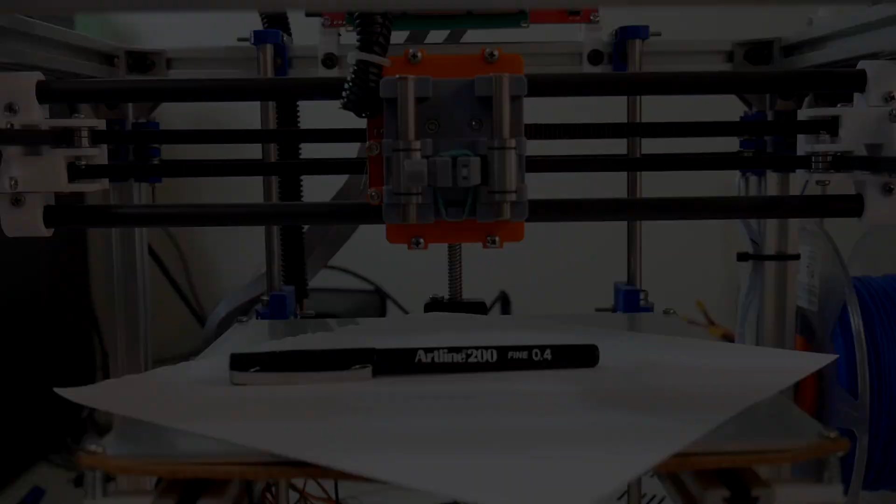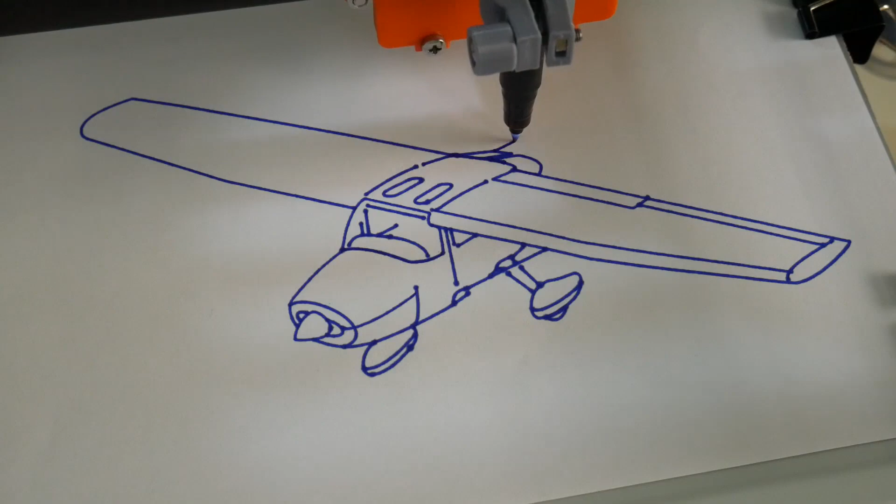In this video we're going to revisit Fusion 360 and how to control our 3D printers with it. But unlike last time where I used a pen to simply draw an outline or trace of an object, and I'll link to that video in the description below, this time I'm going to attach the pen to the X carriage here. We're going to actually draw in or color in a solid shape using the pen rather than just an outline, and to do that we're going to use the 2D pocket feature within Fusion 360.

The pen we're going to use in this video is an Artline 200. It's a felt tip pen with a line width of 0.4 millimeters.

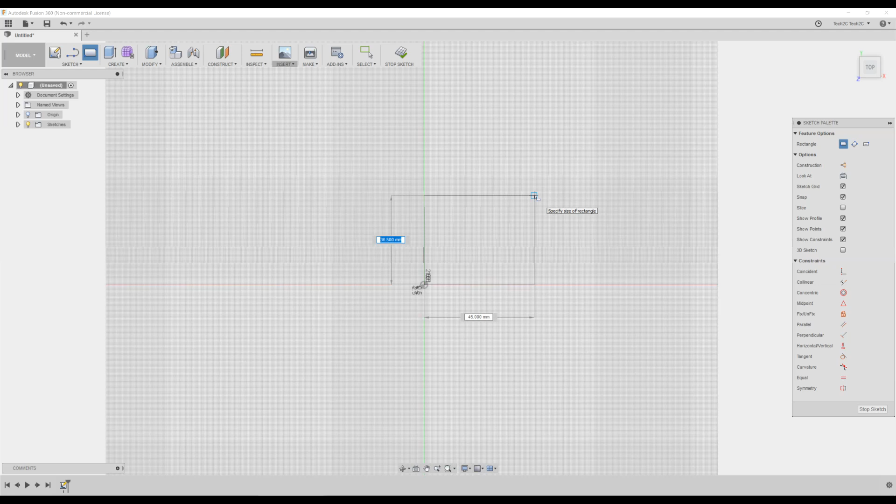To begin, in Fusion 360, I'm going to draw a square on the X and Y plane, starting from the center, with dimensions 200mm by 200mm. This is the size of our build platform. But unlike the previous video where we were just tracing the outline of the shape, we need to make this solid so we can extrude within this shape for the 2D pocket feature. So we'll click on this square, click the extrude button, and give it some height - we don't need much, so I'll just make it 0.1 millimeters. So here is a very large, very flat square, which represents our build platform.

Now we're ready to import our image file. To do that, I'm just going to click on the top of our square here, then click Insert, Insert SVG, and open an SVG file I've downloaded from the internet. This is just a picture of a sports car. And there it is down there, and as you can see, it is upside down as well.

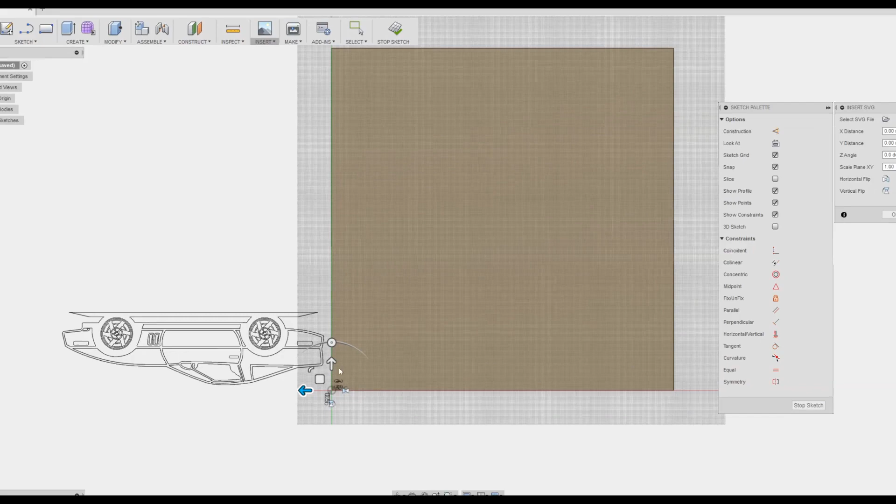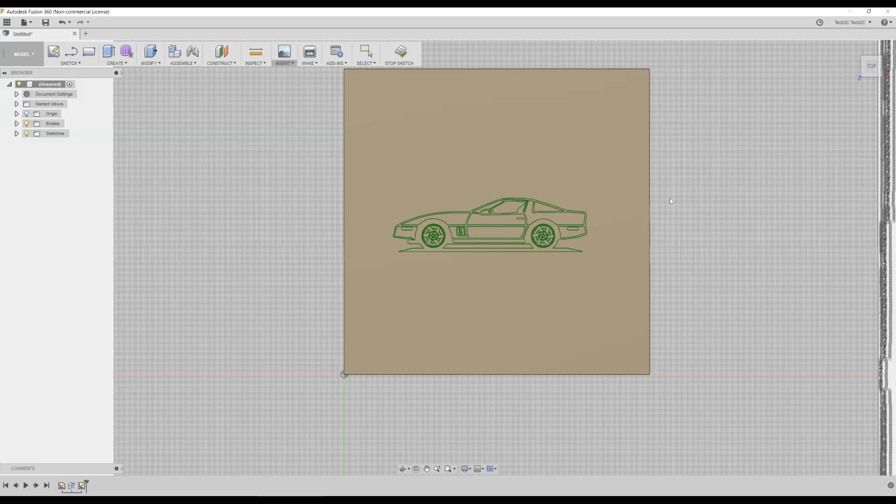So I'll move that into position and flip it on the Y-axis. I might make this just a little bit smaller - it doesn't need to be that large. Yeah, that'll do. And just recenter that once more. Press OK and stop sketch. So now we have a picture of a vehicle on top of this very shallow square.

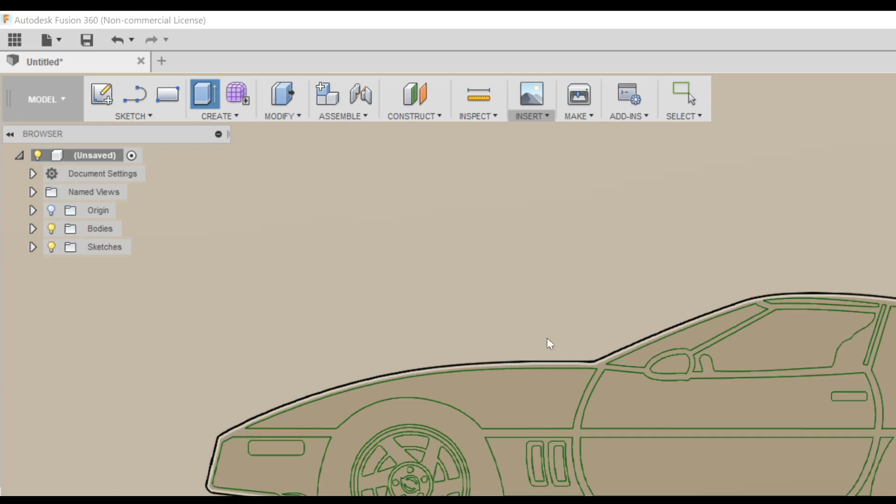The last thing we need to do is actually indent the shape of this vehicle into this square we've just made, to allow the 2D pocket feature to draw the shape of this car. To do that, we'll click the extrude button and choose a shape we want to extrude. This shape here is the main outline of the car, so I'll click that. But I also want the wheels to come through, so I'll click on the rear wheel and the front wheel. Yeah, that'll do. And we need to give it some depth - we're 0.1 millimeters high now, so we want to go inwards, so it's going to be a minus symbol, but we don't want to go all the way down to 0. We want to leave some material there, otherwise the CAM process won't work. So we'll go down by 0.01 of a millimeter.

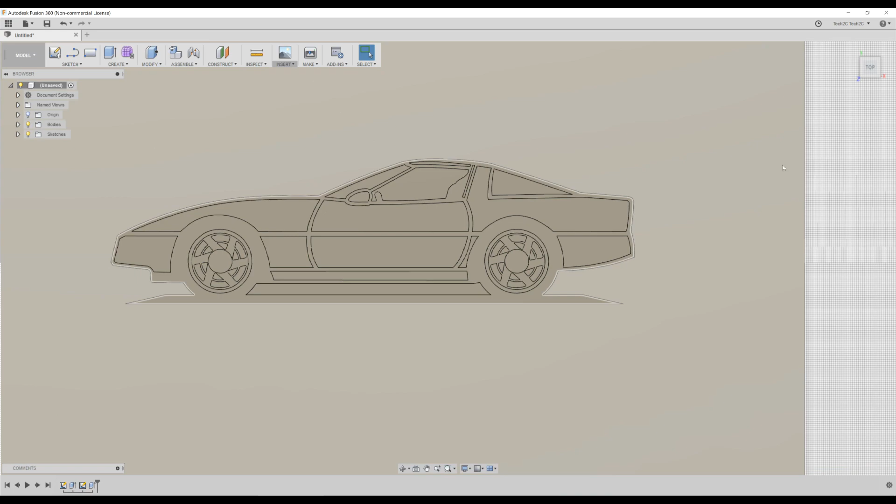So now we have on this very shallow square an indent of the shape of this vehicle.

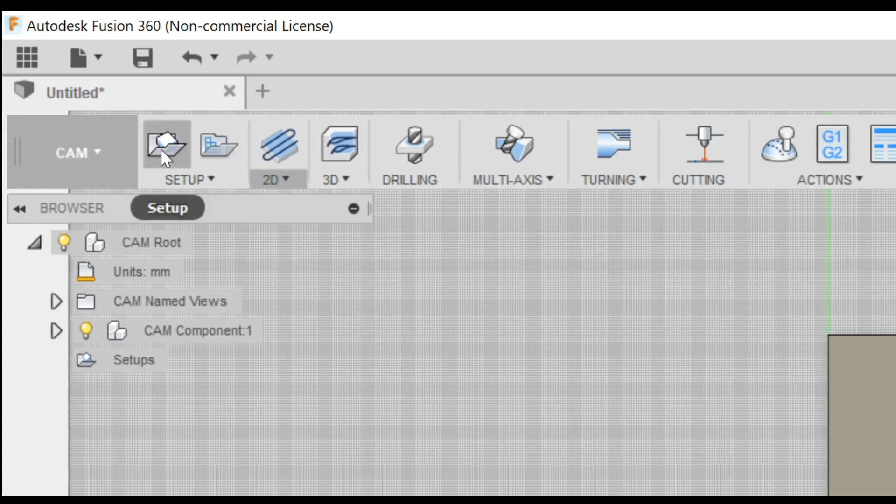Now we're ready to go to the CAM module. To switch to the CAM module, from the top left hand side on the drop down, select CAM. To begin, select Setup from the top left hand side. From the setup options, change the origin to model origin, and you'll see the XYZ arrows move to the bottom left hand side. So this is going to be position 0,0, which it is on our 3D printers.

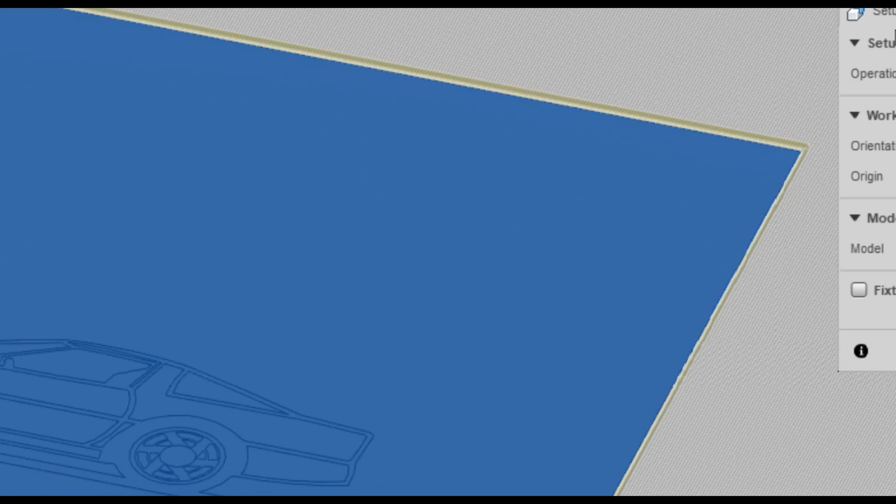Moving across to stock, change the stock offset mode to no additional stock. And as you can see, the 200mm square that we drew earlier is actually going to be our pseudo stock - in this case, it's just the piece of paper. We're not cutting the piece of paper in this example, but it serves the same purpose in this regard. And finally, press OK.

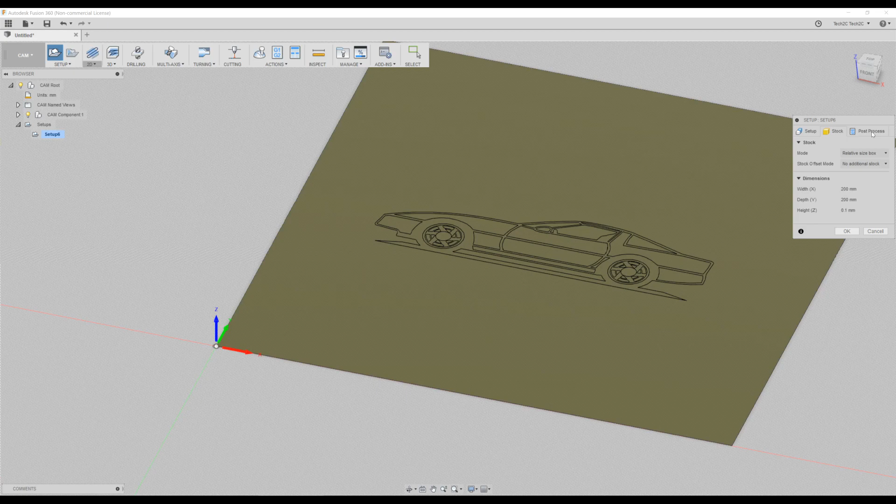Now we're ready to create our 2D pocket, which is going to draw this shape within this square. From the top left hand side, in the 2D drop down, select 2D pocket.

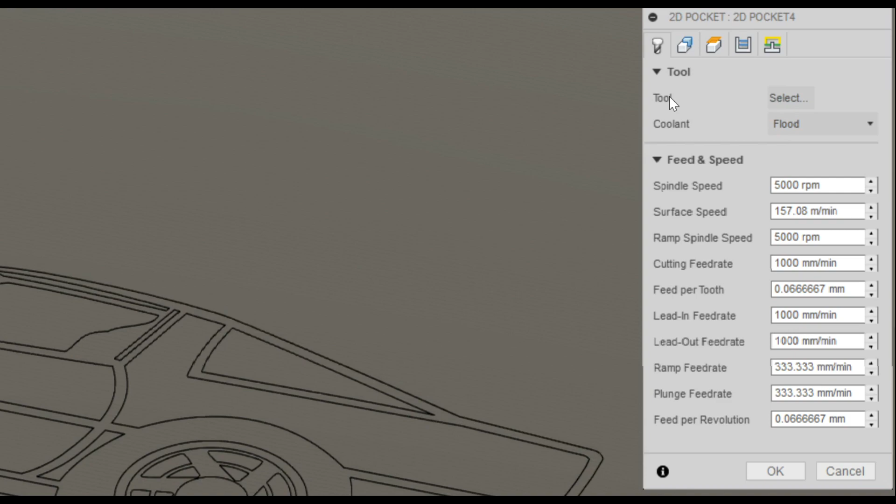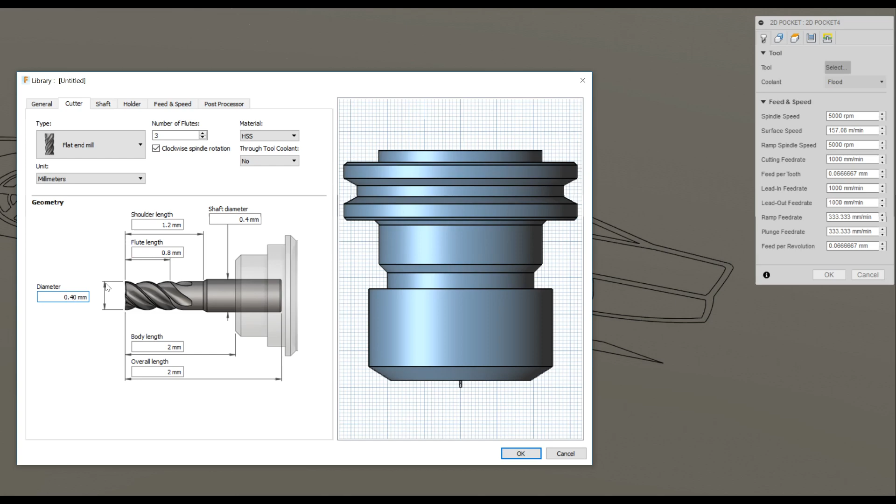From the Tool tab, we need to create our tool, and the tool is just our pen. I've created one earlier, but let me delete this and show you how to do this. Select New Mill Tool. The type is going to be a flat end mill, so this will emulate the tip of the felt tip pen we're using, and the diameter we're using is 0.4 millimeters. That's pretty much all we have to do. Press OK and OK - we've just created our pen with the correct diameter of 0.4 millimeters.

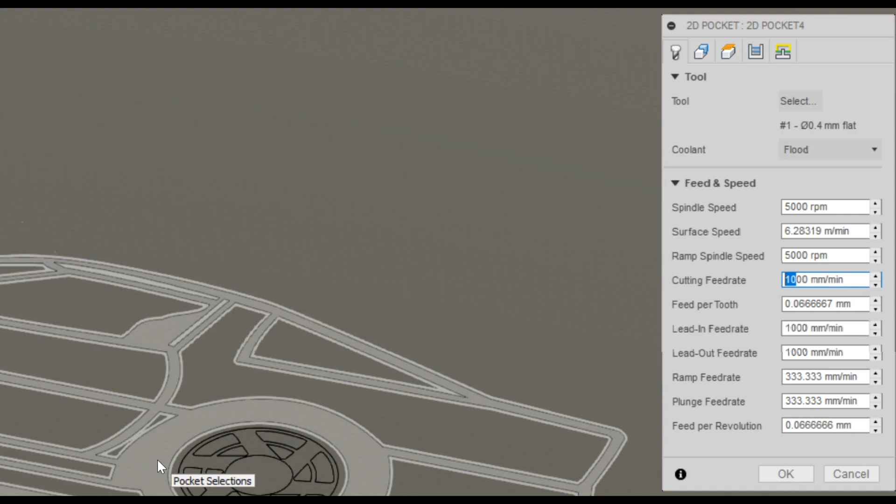With the cutting feed rate, this is going to be the speed at which the pen moves on the piece of paper to draw this shape. Let's increase this to 2400 millimeters per minute, which is 40 millimeters per second.

Moving across to the Geometry tab, here is where we're going to select what shape or shapes we wish to draw with our pen. So let me rearrange here so we can get a better look, and let's first select the main shape of the vehicle.

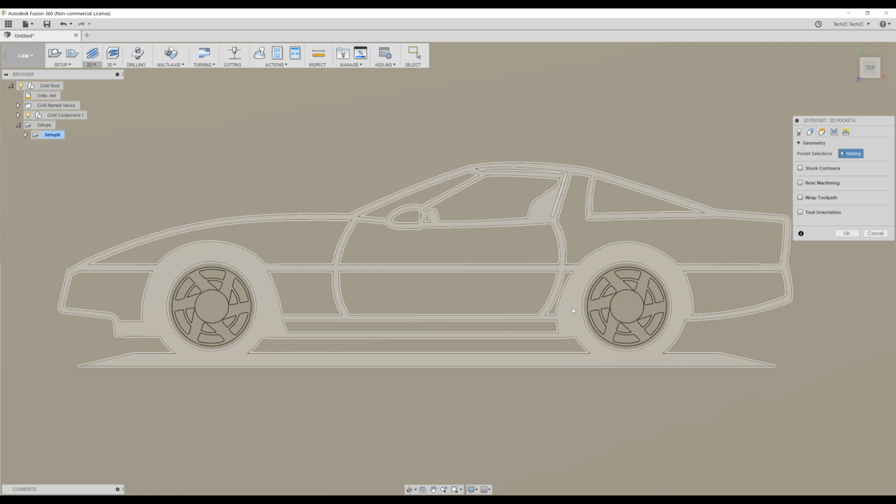Okay, and we'll select the two tires that we also indented earlier within the model. There, so I've selected all three shapes that we indented earlier.

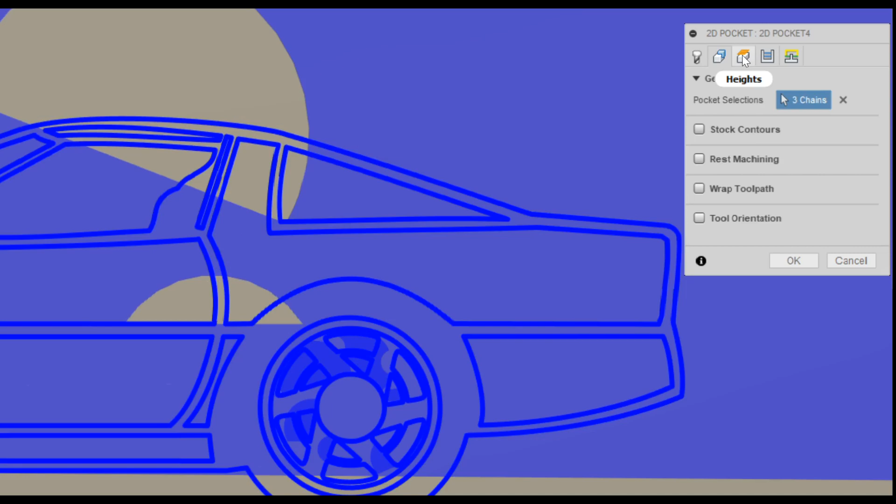Moving across to the next tab called Heights, we're going to change the feed height to 0, the retract height to 0, and the clearance height to 0. So just change all of them to 0.

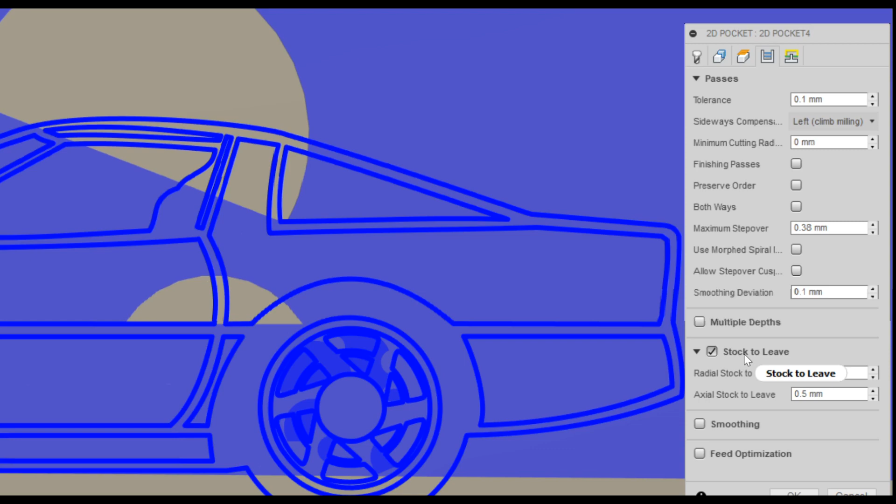Next, moving across to passes, we want to uncheck the stock to leave. We don't want to leave any stock. We want the pen to go right up to the very edge of the shape.

And finally, moving across to the linking tab, we want to uncheck Keep Tool Down. Make sure that your lead-in sweep angle is set to 90 degrees.

Under the ramp type, we want to change from helix to plunge. So the pen is just going to drop straight down. It's not going to spiral its way down onto the piece of paper.

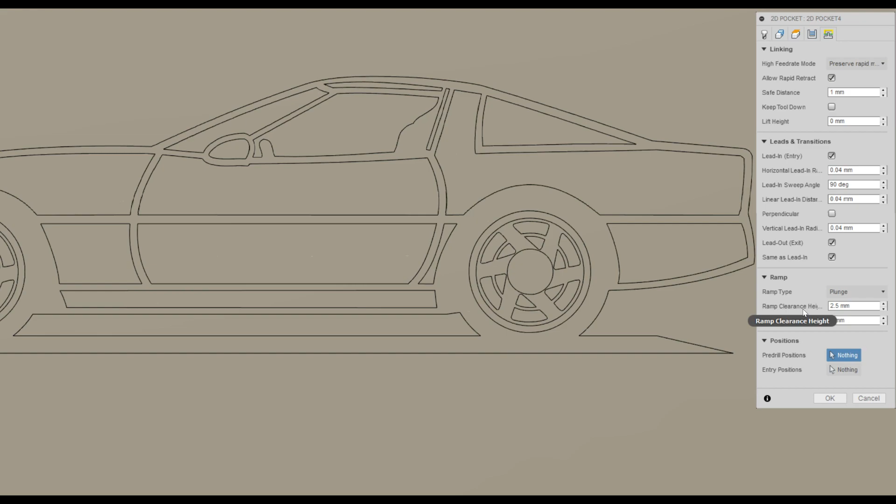This ramp clearance height is actually the height that the pen is going to lift between each of the areas the pen needs to go, so it doesn't squiggle all over the piece of paper. By default it's 2.5 millimeters. We'll leave it at that. And press OK. And there we go.

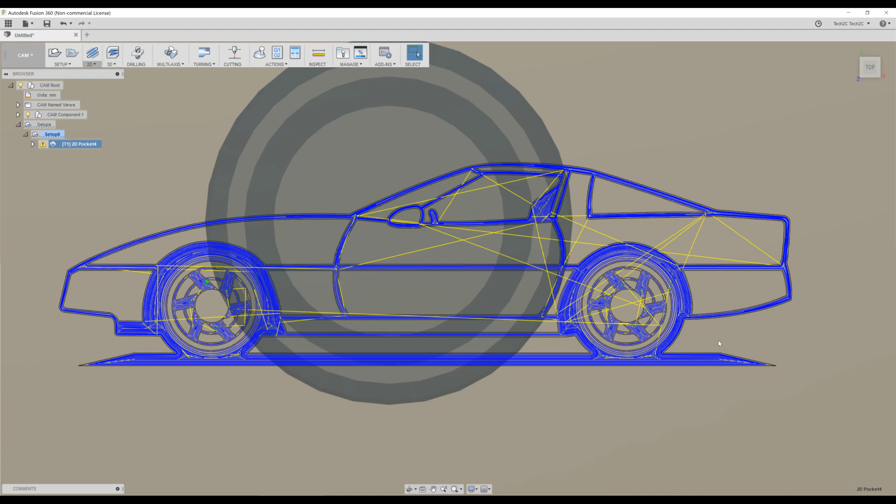We can see all the travel moves that Fusion 360 is going to send to our 3D printers to be able to draw in the pocket of the shape of this vehicle. Each of these blue lines is a pen move within the shapes that we've chosen.

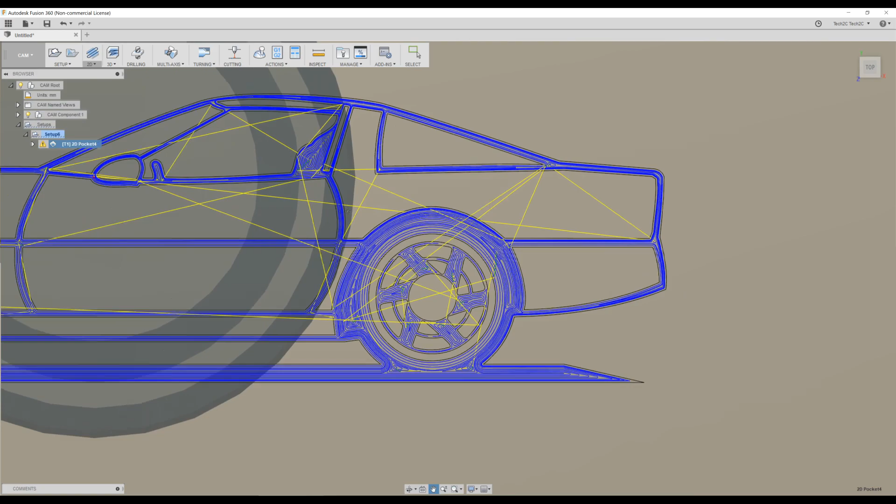Zoom out a bit, and these yellow areas is where the pen is actually 2.5 millimeters on top of the piece of paper, moving across, and it drops back down.

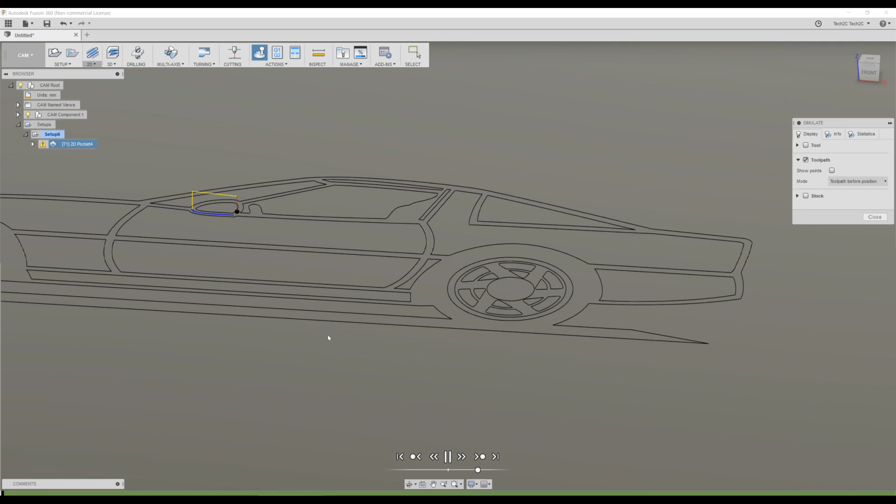So we can actually simulate how this is going to be drawn by clicking the Simulate button, and then by clicking Play. And we can see how the shape is going to be drawn onto the piece of paper.

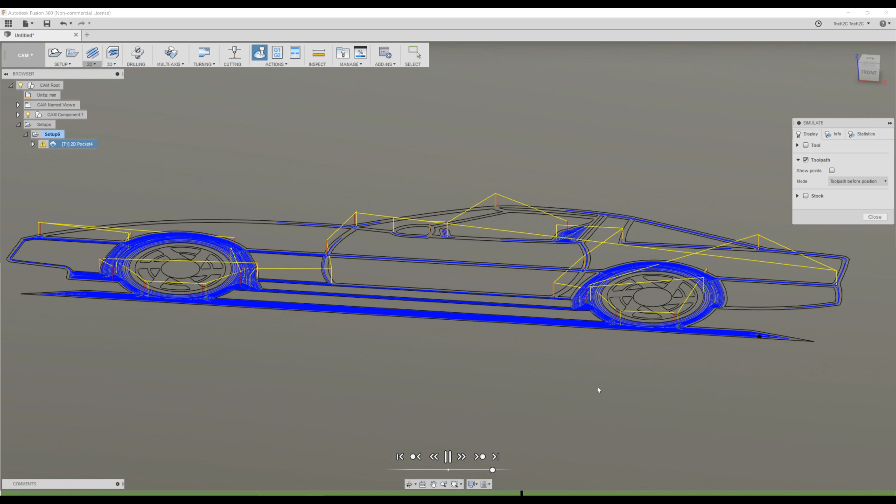I can speed this up a bit. I'll move this up a couple of notches. Speed this up a little bit more. So you can see the pen is working its way around the car, and finally it's finished. Looking up at the statistics, Fusion 360 tells me this is going to take 4 minutes and 49 seconds.

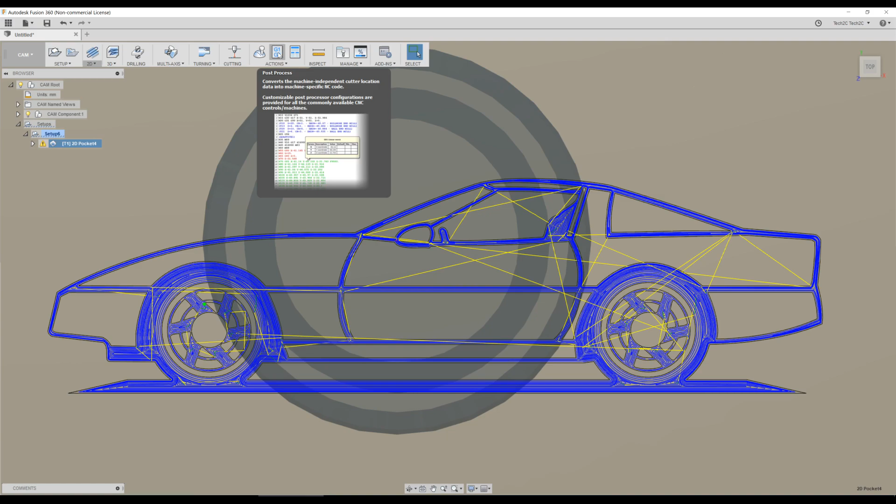Now we're ready to export our G-code file. To do that, click on Post Process. Make sure you have the HyperCube CPS file installed within your Fusion 360 program.

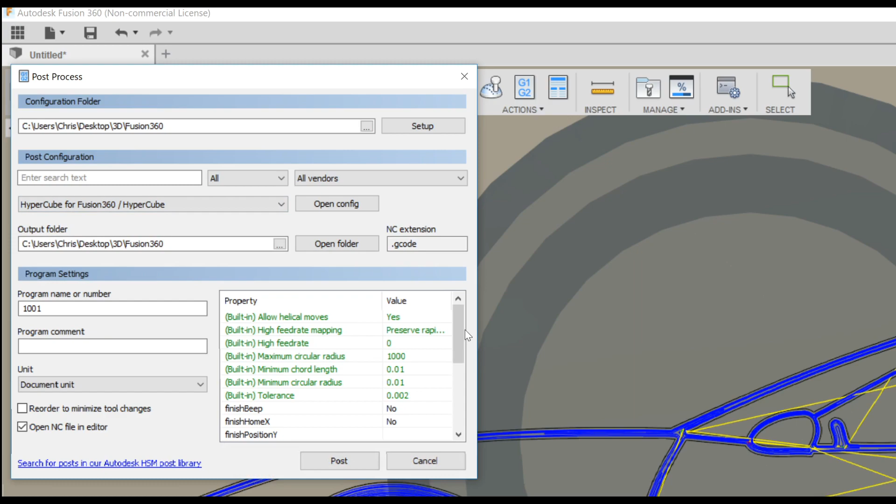Click on the Post button, give it a name, Sports Car, and save. And here is our G-code file, ready to be plotted or drawn by our 3D printers.

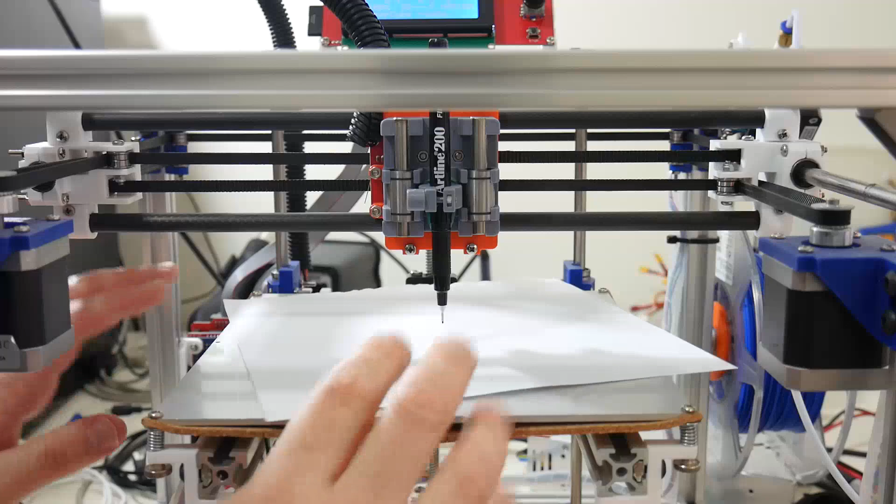So I'm just going to clip an A4 piece of paper to the build platform here. You want to make sure the paper's not going to move throughout the drawing, because that felt tip pen is going to move the page around quite a bit as it slides across.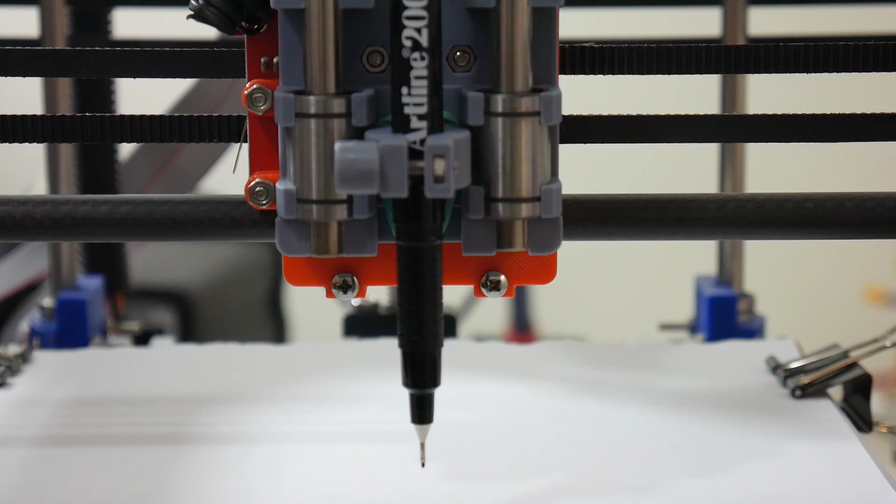I've also mounted the pen within the pen holder. We just need to home the pen manually first. So I'm going to move the pen to position 0, 0, which is exactly what we did within Fusion 360.

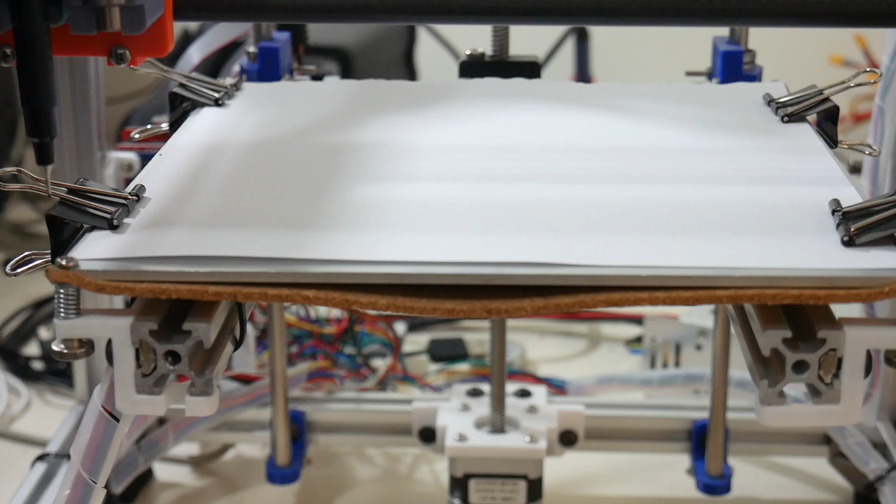And I'm just going to raise the Z-axis, just until, and I'll zoom in a bit more there, just until there's approximately 1 millimeter of down pressure from the one-axis pen holder.

As you can see, as I'm raising the Z-axis, you can see the pen holder is pushing up. So just 1 millimeter is enough. That's just to ensure that we're going to get enough downward force to draw this image.

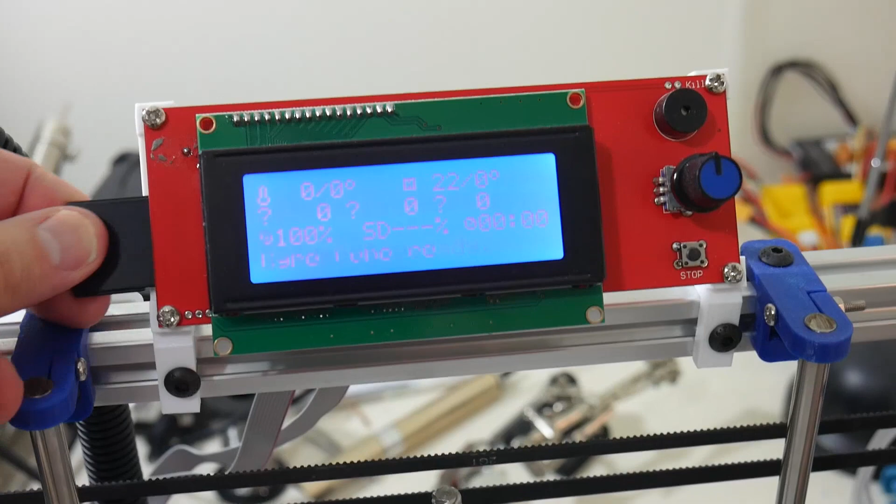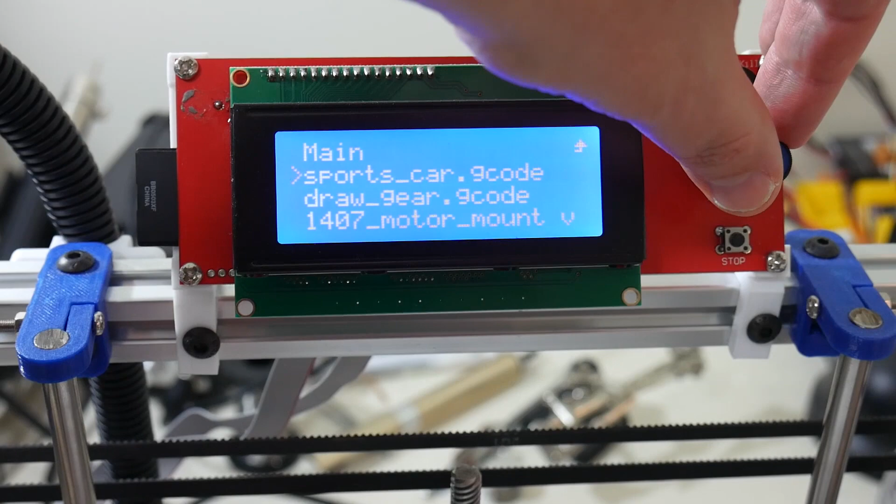I've copied the sports car G-code onto the SD card here on the side. So we can browse the menu, select print from SD, and there it is there. Sports car G-code.

And it just finished. Says it took 5 minutes and 4 seconds to complete, which is pretty close to what Fusion 360 predicted. Just remove the clips from the piece of paper and we'll have a good look at the quality of the image that's been drawn from Fusion 360.

That is pretty good. What I like about this is it doesn't matter how thick or how wide the actual shapes are, it'll draw them. It all comes down to the actual diameter of the pen that you're using, which governs the detail, I guess you could say, of the actual car.

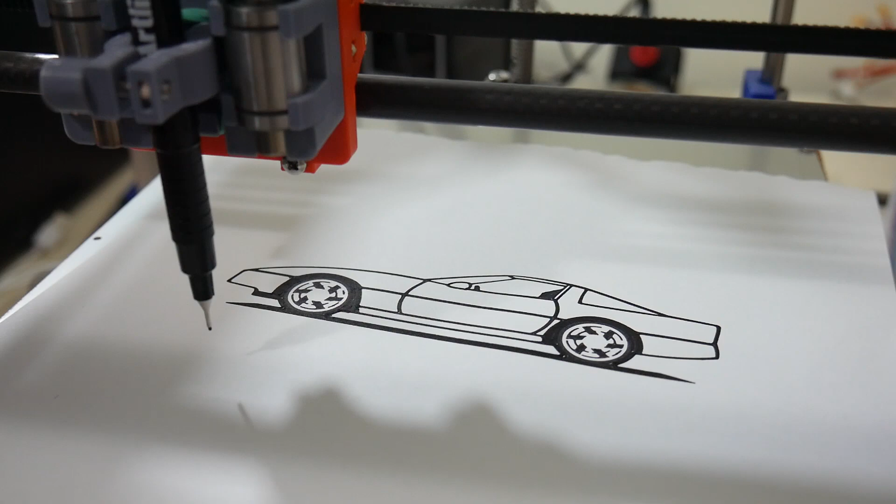And there you have it, using the 2D pocket milling feature within Fusion 360 to draw solid objects with our 3D printers. Of course, it doesn't have to be a pen attached to your 3D printer. It could be, for example, a small engraving tool, so you could engrave onto a hard, flat surface. Or it could even be a hot tip on the end of this, such as a soldering iron, and you could burn a particular shape onto a wooden surface, for example.

But starting off with a pen, just to make sure that you understand how something is going to work and how something is going to look beforehand, is a great thing to do.

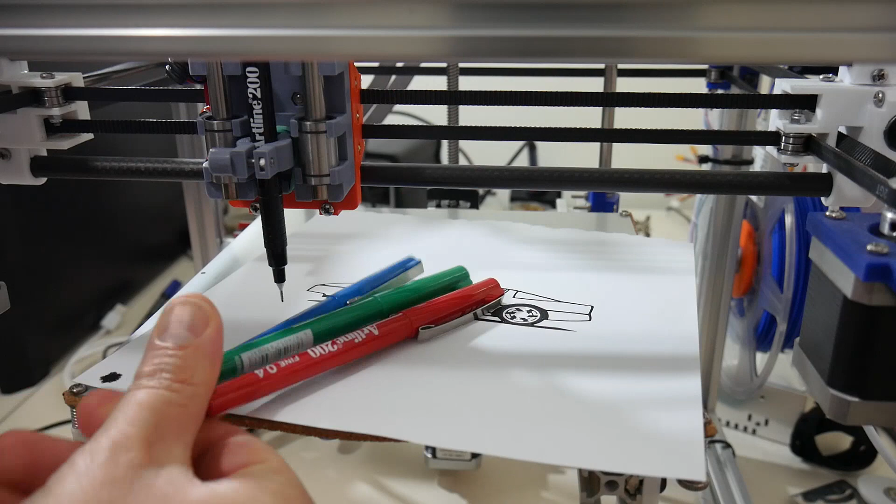And let's not leave it there. I have these 3 other coloured pens here. I wonder if we can change the tool midway and actually colour in the rest of this car.